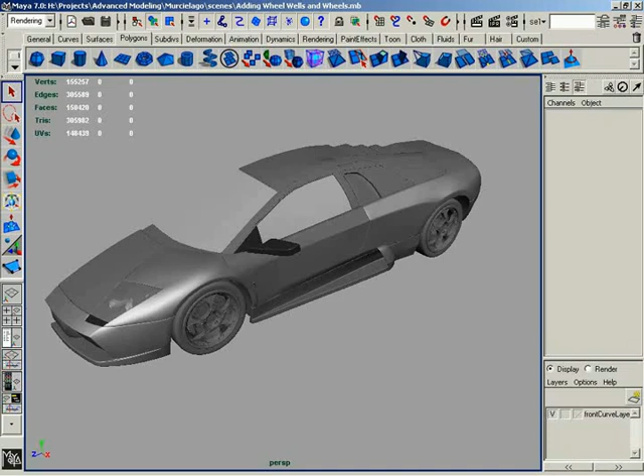Alright, it is finally time to mirror the body of our car over to the opposite side.

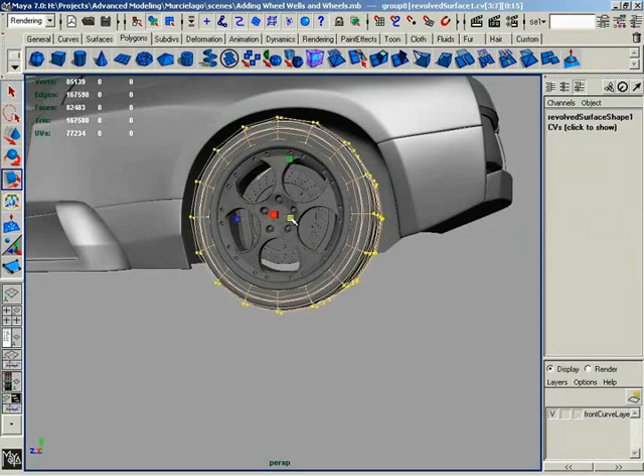First I want to look at the wheels, because there was something I forgot to mention in the last video. The back tire's rubber part is actually bigger than the front one. So grab these five hulls around the tire and scale them up uniformly just a little bit, which will increase the size of the tire. Then select any part of the wheel, press the up arrow key to grab that group, and push it up a little so the wheels are level to one another.

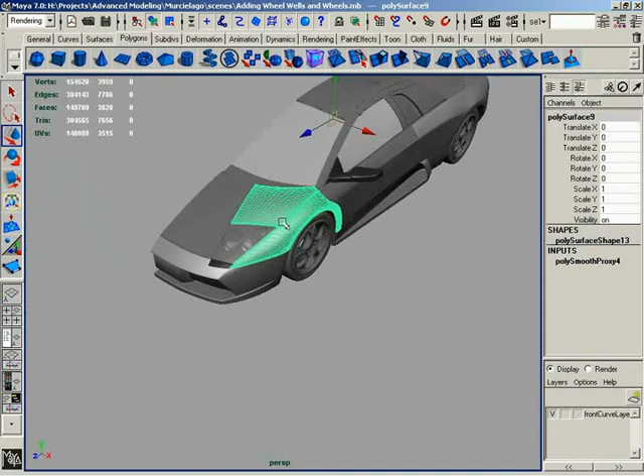That looks nice. Now we need to kill off some of that extra history we may have failed to delete. Depending on how religious you were about deleting history, you might have some or none. I know I have some. Go grab all of your smooth proxy meshes and set them to low res. Be very thorough, even things like the inside of the mirror. Make sure every piece is set to low res, and this is where that blend material really helps you visualize what's still set to high res.

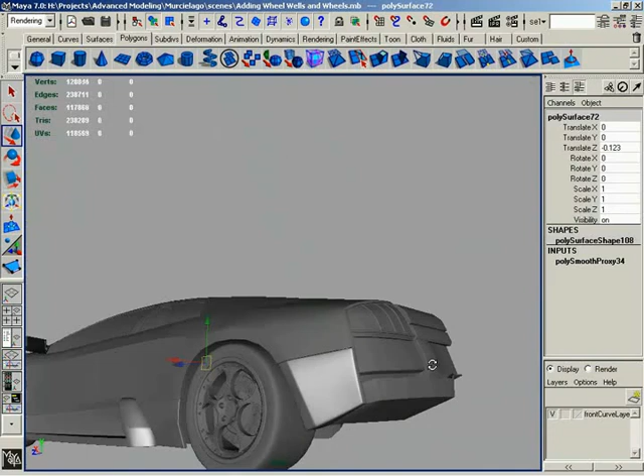Looks pretty good. Also, because of how we duplicated this rim, we don't have a connection between the low and high res that we can switch between with the tilde key. So delete the high res on this rim, select the low res rim geometry, hit Control-tilde to create a new high res, and then you can toggle between the two. Just a quick trick from me to you.

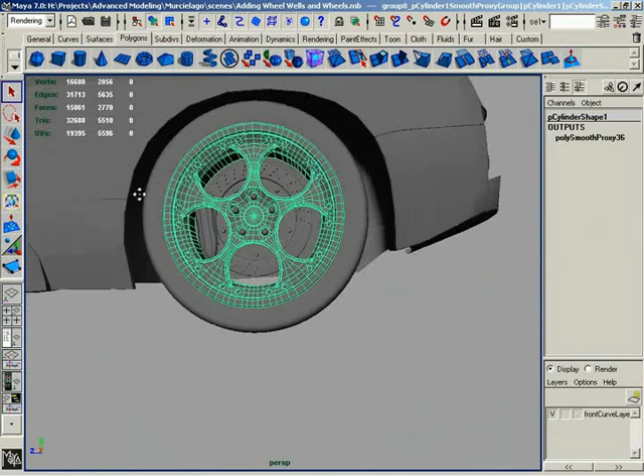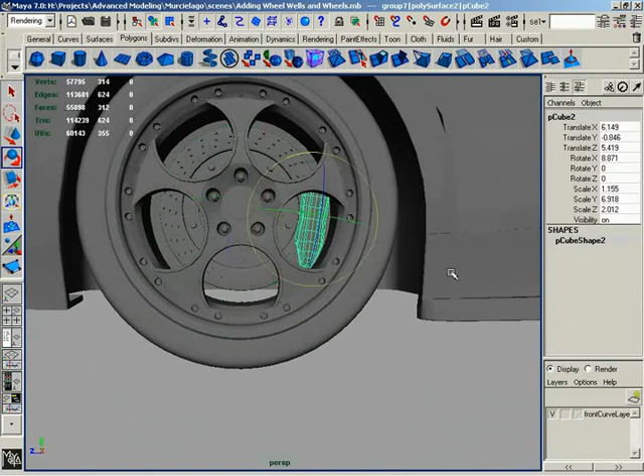One more thing about the wheels. On this car, the brake calipers in the back are at the front of the wheel, but at the front wheel, the brake caliper is actually at the back. To spin this around, grab your brake caliper, shift select your brake disc, hit P to parent, then grab the brake disc and spin it around. Just spin it around in X, like so. I think it's a little low, not exactly on the back, down just a tad. Then grab your caliper by itself, hit Shift-P, and there you go. Just a real quick trick, me to you.

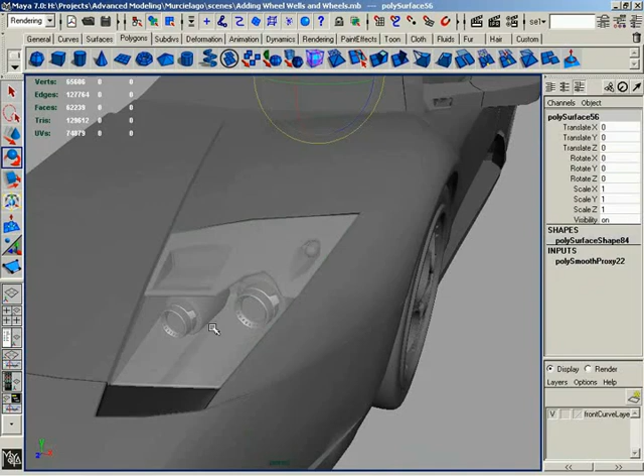Now that we've done that, we need to go through and systematically kill off some history. Look at that, still on high res — be sure to set that to low res. I'm adamant about this because if you accidentally delete history on a high res object, you lose that connection between the high and low res. So make sure everything is set to low res, including this one here. Take it one piece at a time: select it, whether it has history or not, then go Edit, Delete by Type, History.

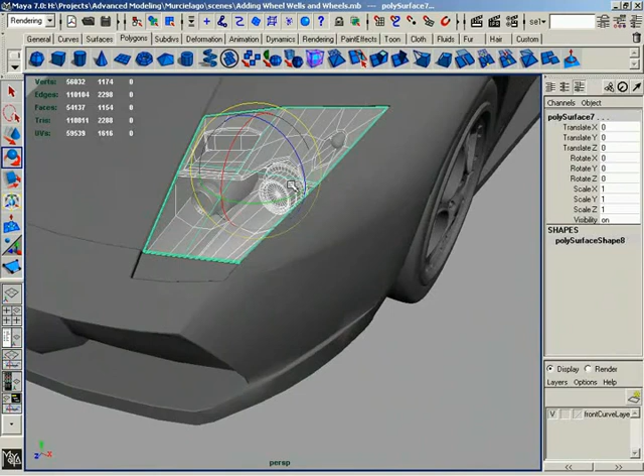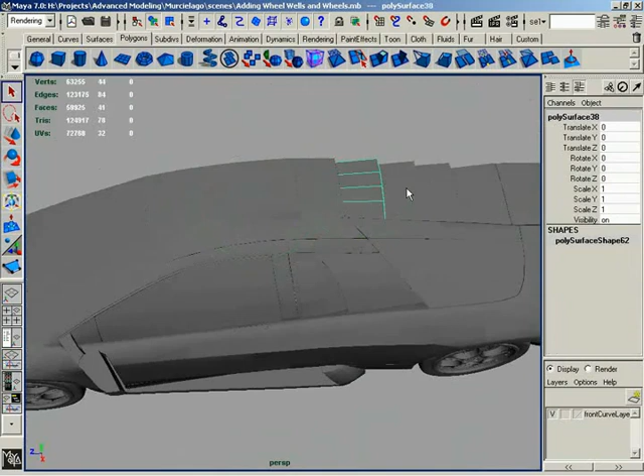Now I can just start clicking and hitting the G key — anywhere you see history, just hit G. That had a little bit. Ooh, this one's got a lot. That's got some history, and that's got some history too. Look at us killing off the history all over the place. We can probably grab all of this at once and kill off history here and here. That's got a lot, that's got a lot, this has got a lot. Ought to be ashamed. Tons of history there. Let's grab all of this and kill that off. Oh, that's still on high res, so set that back to low res first, then delete its history. Okay, that's everybody — all history is now gone.

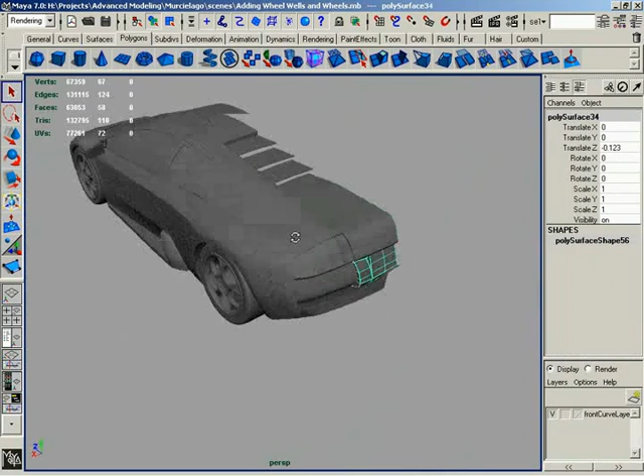Now we need to mirror over to the opposite side. Here's a quick trick for this: come over to the top view and draw a marquee selection box that just barely covers the very middle of the car. This will select all the pieces that need to be mirrored.

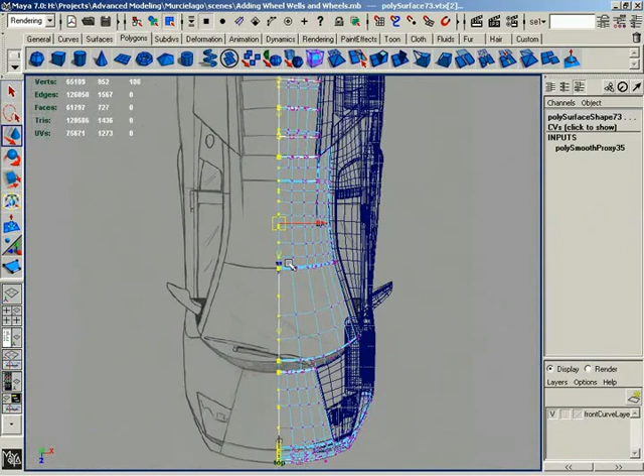Now that you've done that, back in the top view, press F9 to select vertices. Draw another marquee selection box that just barely covers over into the model — this will grab all the vertices that need to lie on the central axis. Get your Move tool, make sure it's in World mode, click the X-axis, hold down the X key, and middle mouse click on any grid point on the center line. This snaps all those vertices back to the center X-axis, which is what you want.

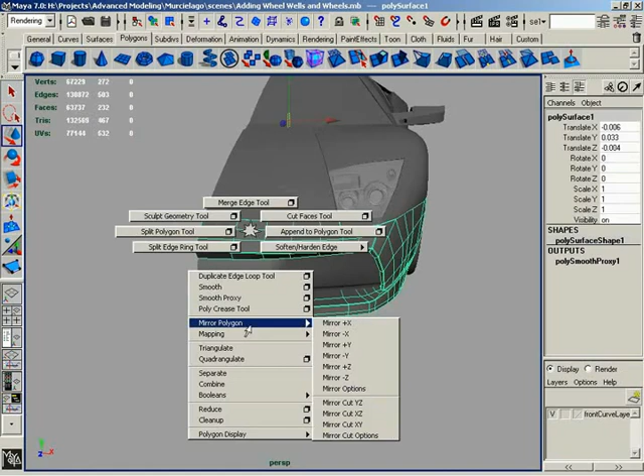Alright, time to start mirroring geometry. Take each piece that needs to be mirrored, hold down the Shift key, right mouse click, come down to Mirror Polygon, mirror in -X, boom, there you go. Now grab each of these pieces and hit G — but only the pieces that actually touch the center axis. Do not try to mirror things that lie outside, like the mirror or the headlight.

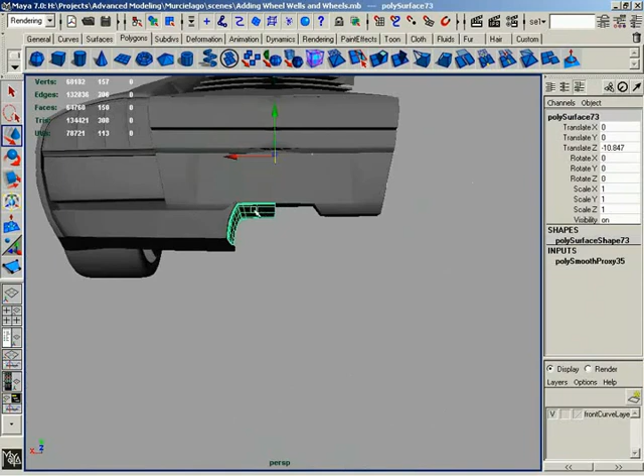Okay, and this, and this, and this. Oh, look at that, folks - that was still set to high res.

Undo, undo, undo, undo - make use of those undos. You know what they call that? They call that a mistake. So there it is, back on low res. Now let's delete out its history.

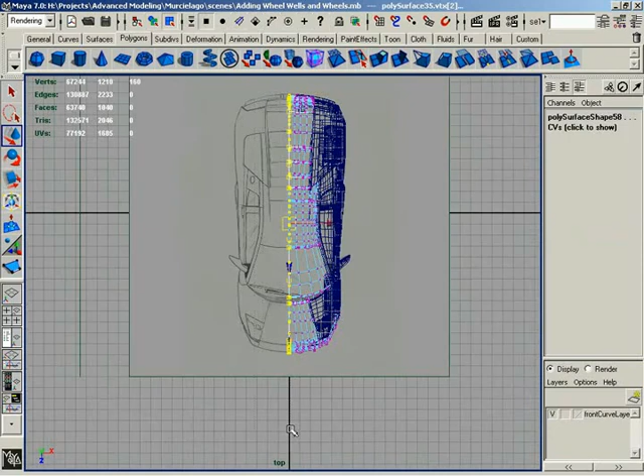Watch out for those. Okay, now real quick, same story a little bit faster. Grab everything that runs down the center, F9. Grab all the vertices that lie on the central part of the axis. Snap those in X right back to the center of the grid. And now start mirroring - shift, right mouse.

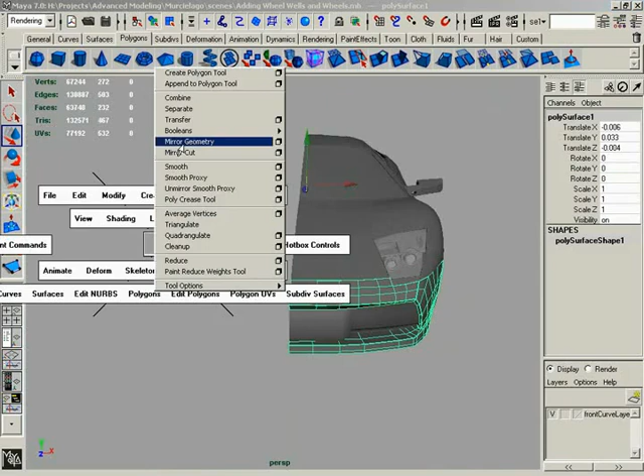Come here, you. Make sure I have that selected. Am I in some sort of weird object mode that I'm not aware of? I guess so, that's fine, we'll just do this the other way. Polygons, mirror geometry, and let's make sure that we are set to -X, like so.

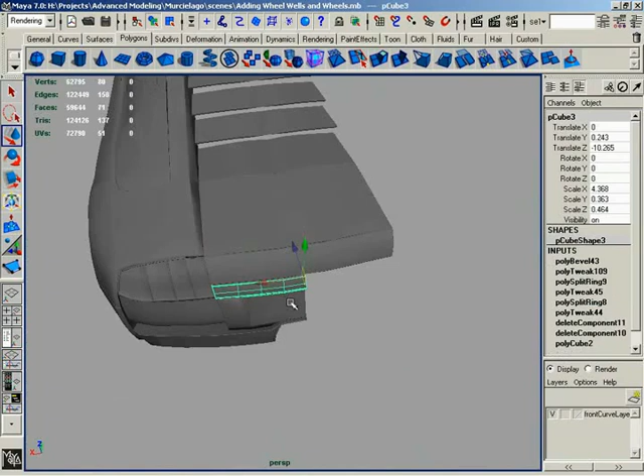Now just hit G all the way across. Make sure you grab, say, this guy here at the middle. Looks a little bit weird. Oh yeah, don't worry about that - things will look weird right now, we'll fix that here in just a moment. So mirror all of this, all of this, all of this. Little wing here in the middle, and finally this little piece.

And there you go. Now you'll notice some pinching, some problems, and this is because you are over-merging - your merge tolerance was set too high. It's not a problem, just grab all of these pieces you just mirrored. It's real easy to do in the top view. Go to your inputs and click on that poly mirror node.

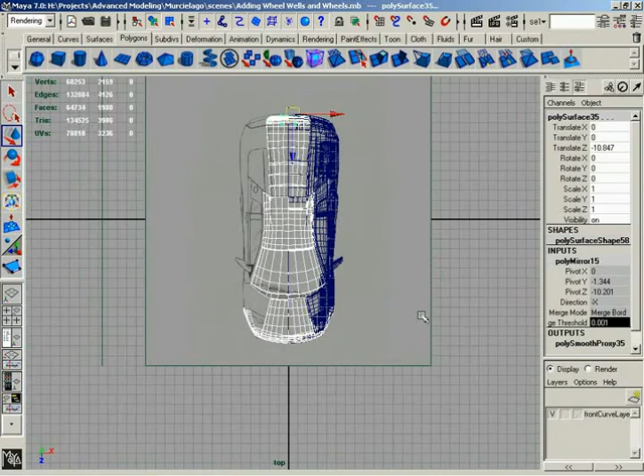You're actually changing several nodes at once. Set your merge threshold down to 0.001 - that will fix these all the way across. Now take just a moment and check each of the pieces you just mirrored. Looks like we need to mirror this one - missed it. So let's see: mirror geometry, -X. There you go.

And since I don't have this smoothed, we will just go ahead and soften, harden edges. We'll soften all of those. And I may end up smoothing that here before all is said and done.

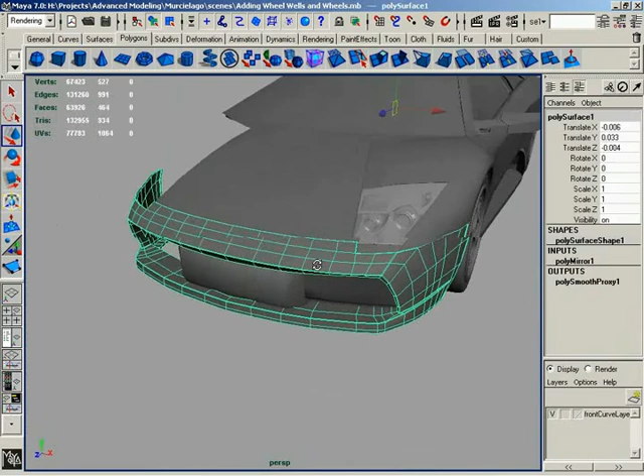But take just a moment, set these to high res, and look for any errors or discrepancies. The hood looks pretty good, this piece looks good, windshield looks good. The roof looks like it needs some tweaking - it looks like somebody sat on the roof and kind of crushed it in.

So these are some things that are a little bit tricky to discover until you have mirrored, in some cases. So don't worry about it, just take a moment and fix it up.

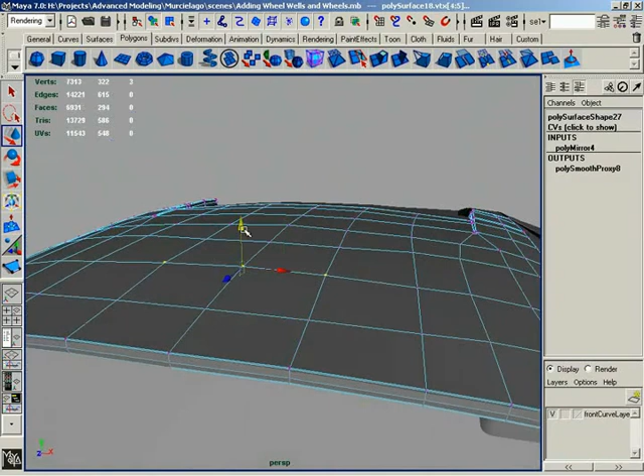And it looks like these need to be kind of brought up, and then we can probably bring all three of these up together just a little bit. Pull this guy up, and I think that fixed it right up. So there you go, and that's looking pretty good.

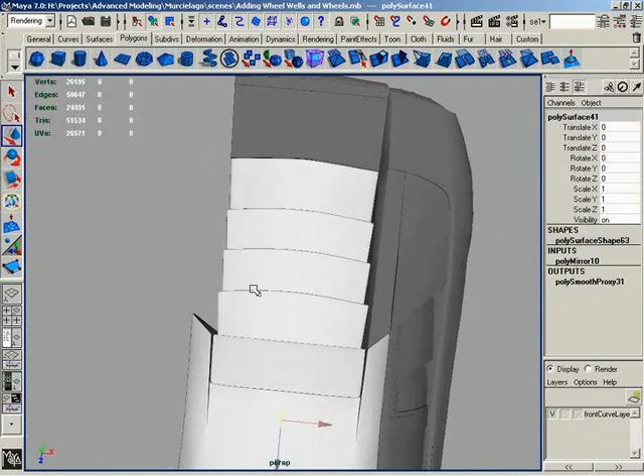And it looks like these pieces back here in the back, they're looking pretty good, but it looks like maybe there should be some more rounding - like there's a little bit too much of an angle on the left and right sides.

So here's a real easy way to fix this. Set them back down to low res. Take your move tool, hit W, left mouse, switch on reflection. Now in my case, we're reflecting on the x-axis - you can tell because you see the little plane appear on the move manipulator.

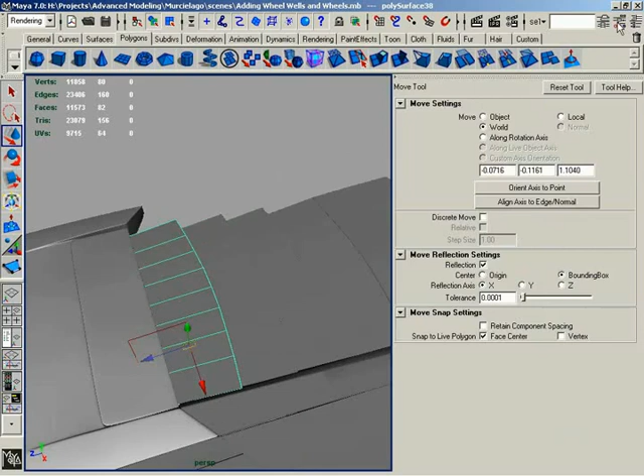This is a Maya 7 feature, by the way. Make sure your reflection axis is set to X - if you need to switch on your move tools for just a moment, check out your options. Now the cool thing about this is it's going to make the exact same motion on the opposite side of your model. So we can grab, say, this vertex, tug it out a little bit to create rounding.

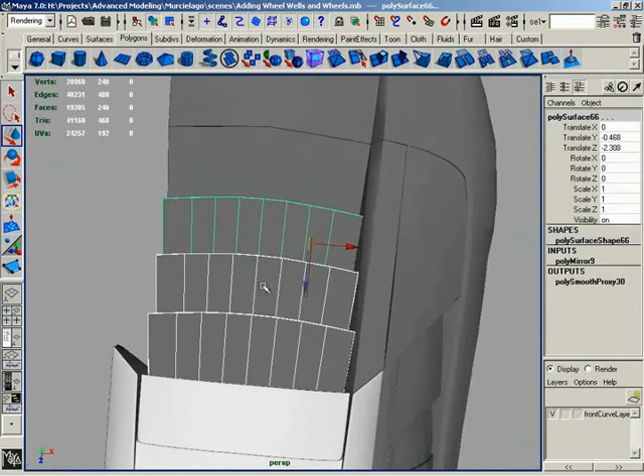But what I want to do is go into object mode for just a moment. We're going to grab all three of these panels, then press F9, and we're going to fix them all at the same time. So if I grab all three of these vertices, notice I'm actually moving their neighbors on the other side of the model as well. How cool is that?

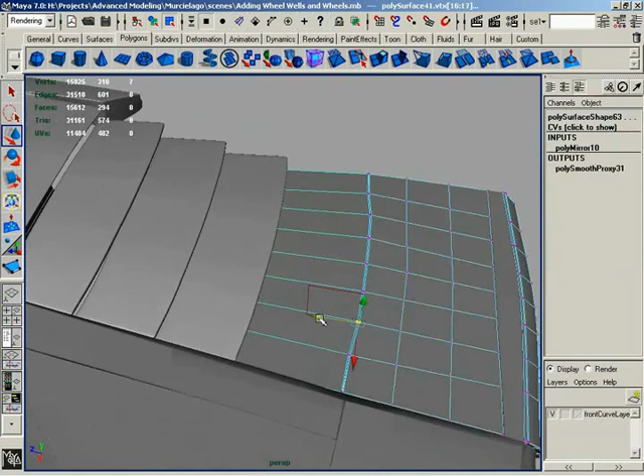And I think that did it - just a couple of quick tweaks, and now the rounding looks a bit nicer. Let's clean the rounding up on these two pieces as well. So we'll select the both of them, press F9, and just make a few quick adjustments.

All right, there we go, sweetness.

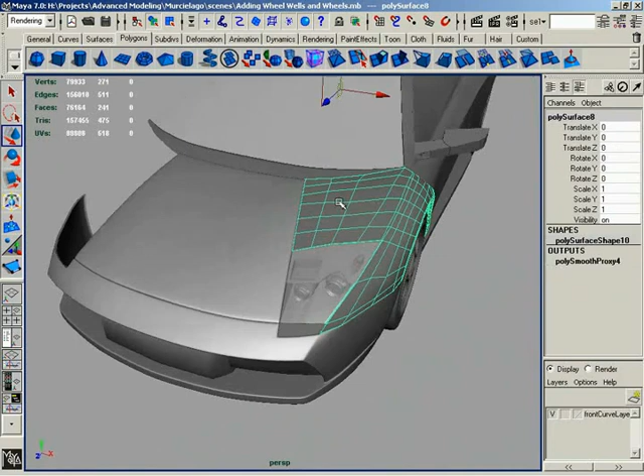After we've done that, all we need to do is start duplicating these other pieces over. These are pieces that can't be mirrored—they need to be sent over to the other side of the model. If we try to mirror these with shift, right mouse, mirror polygon, and -X, you'll see it just mirrors at its minimum.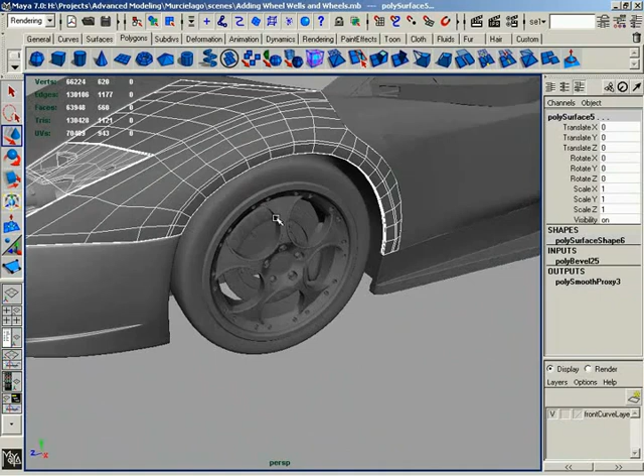We actually want to duplicate it far over to the other side. So we'll start by selecting every piece that has been smooth proxied. This might take a second, so be patient. There's all the windshield pieces, the fender—don't worry about the rims, we'll handle those separately, just worry about the car itself. There's the door, the mirror, the piece inside the mirror, the window, the door piece. And look, we deleted history on this, so that's now the official one.

Oh no, it's not. I thought we had killed history on it. Goodness gracious, let's kill off its history now. I must have skipped it somehow. No problem though, as long as we catch it at some point.

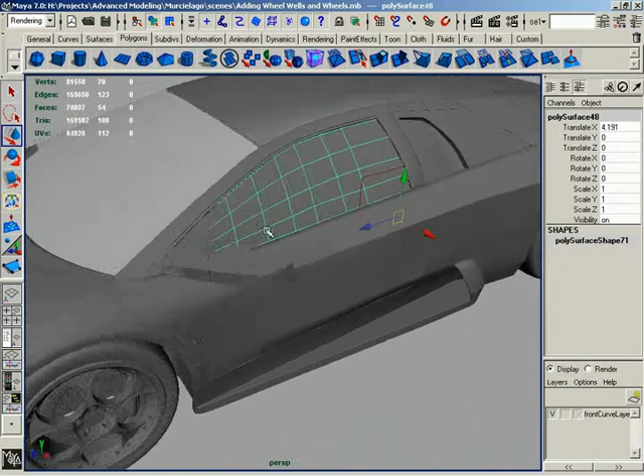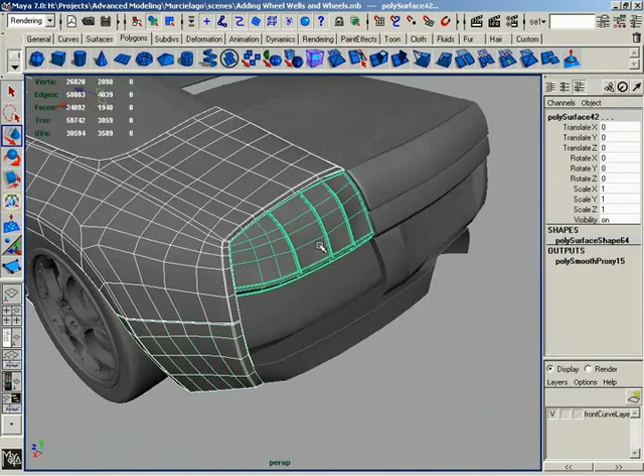So reselect, make sure you get the low res over here. Low res, low res—you want low res on all of these. It really doesn't matter which one, but I'd prefer if you selected the low res. Everything that was smooth proxied, again ignore the rims, just body parts—that would be the bumper and the wing, this little straight piece up here. I think that's everything. Now press the up arrow key once, and this will grab all the smooth proxy groups—a group that's automatically created when you smooth proxy, containing your low and high res mesh.

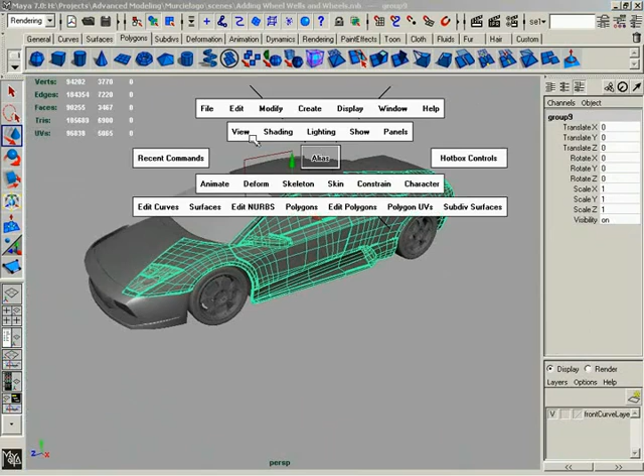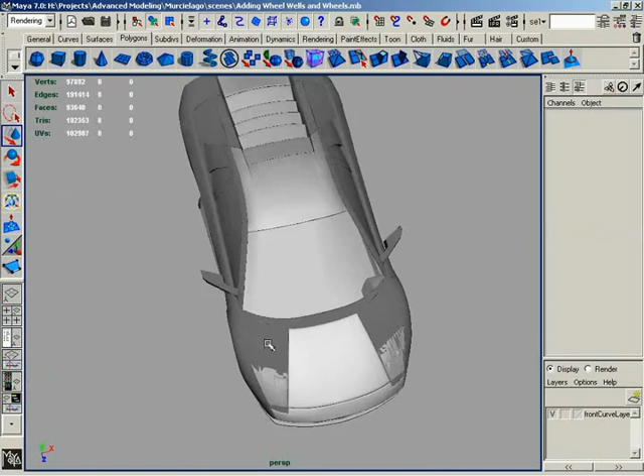Now that you have those, hit Control G to group all of these together. Under Edit, come down to Duplicate, open up your options, and I'll reset my options real quick. Make sure you check Duplicate Input Graph, so you're grabbing all the connections between the nodes. Then hit Duplicate. Now you have Group 10 where you had Group 9 a second ago, or whichever number you might have—it might be different in your case. Set the scale in X to -1, and it comes over to the opposite side. Because you duplicated the input graph, you have a low and high res for all of these pieces as well, and they can all be toggled. How nice and easy was that?

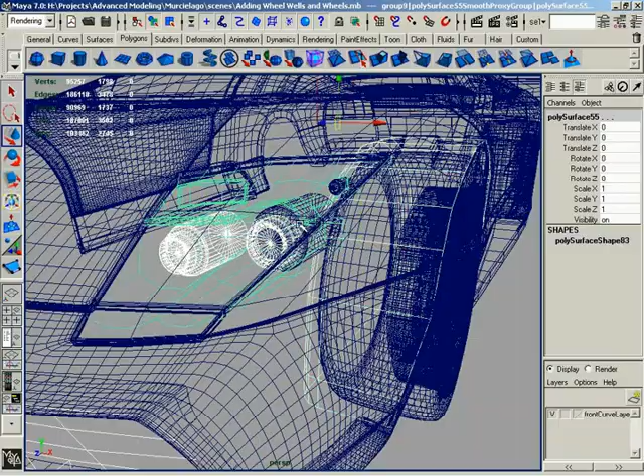Now let's start grabbing some of these pieces that were not smooth proxied—things like this little vent piece up here in the front, the wheel well. If I go into wireframe, the pieces of the headlight are a little easier to select. All the little lamps that are up inside. Again, don't worry about the wheels for now. We get the wheel wells, and we have this little vent piece back here in the back. I think that's everybody.

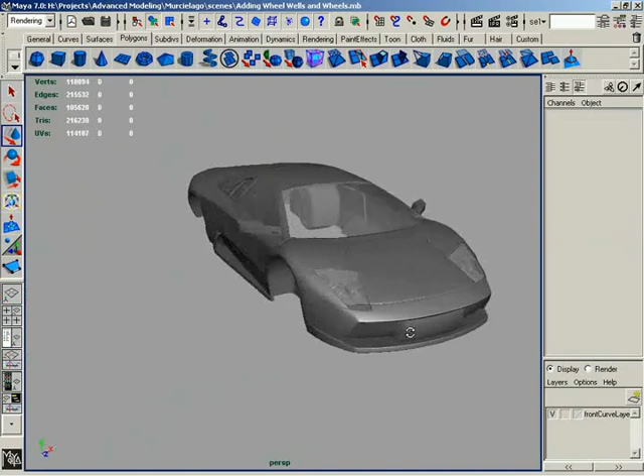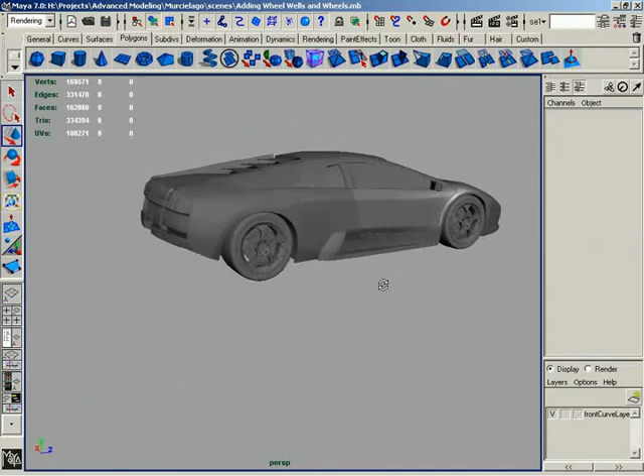So now we'll do the same thing: Control G, Control D, set scale X to -1, and now that is also on the opposite side of the car. Looking good, now you just have the wheels. So you can press the up arrow key, select either part on both of the wheels, press the up arrow key and hit up until you have both of these groups selected. Hit Control G, Control D, once again set scale X to -1, press Enter, and there you go—with that, your car has been completely mirrored.

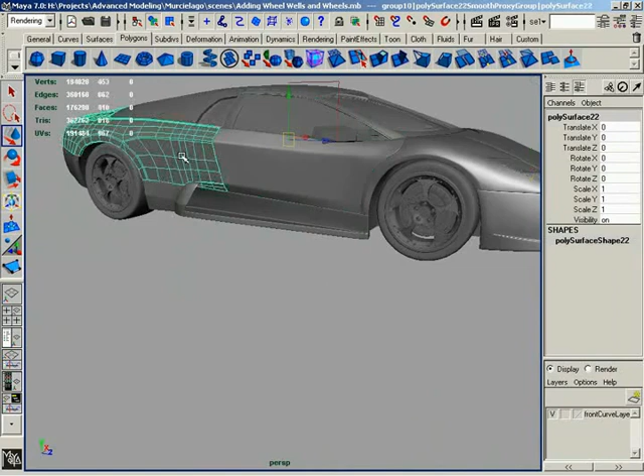You can now, if you want to, switch over to high res on all of the bits and pieces. So take just a second and I'll do that just so you guys can see the final. And that's still high, that's high, that's high, that's high. Dun, dun, dun, dun, dun. And that was already cranked up. High res, high res—your materials also came along for the ride. How cool is that?

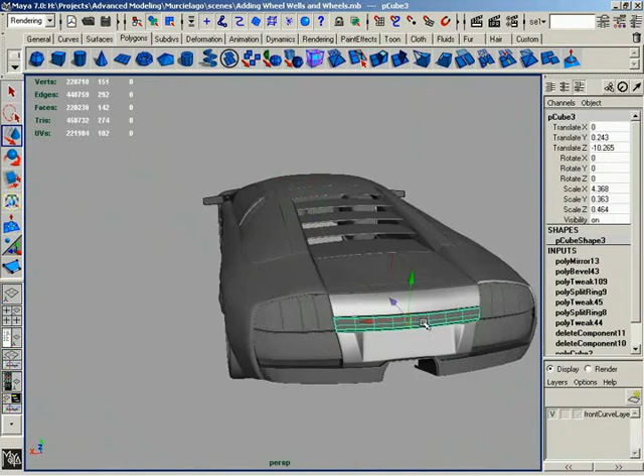Whew, getting a little bit heavy on the old viewport, isn't it? That's the cost of a beautiful model. That's the smooth, but it didn't have a material on it. Okay, there you go, I guess we could.

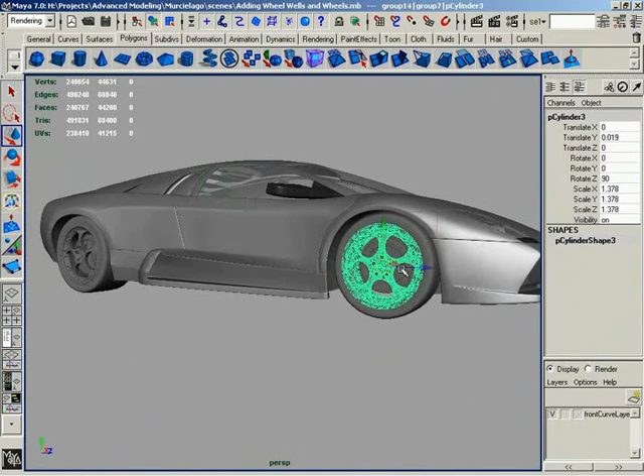The only other thing we could switch on are the rims themselves. In this case, we don't have the high res on the rims again, so rather than fool with whatever our duplicate settings were, we can just delete out the high res, then hit Control tilde on the low res to get a new high res. Back here, this one actually is switching, so that's all good. This one's not switching, so we'll kill out the high res, Control tilde to create a new high res—very quick fix.

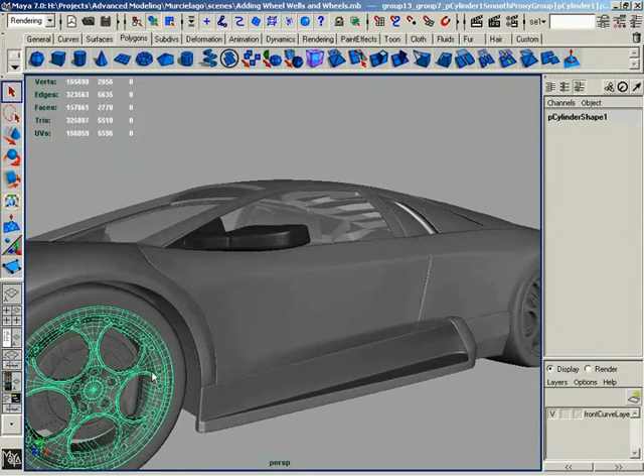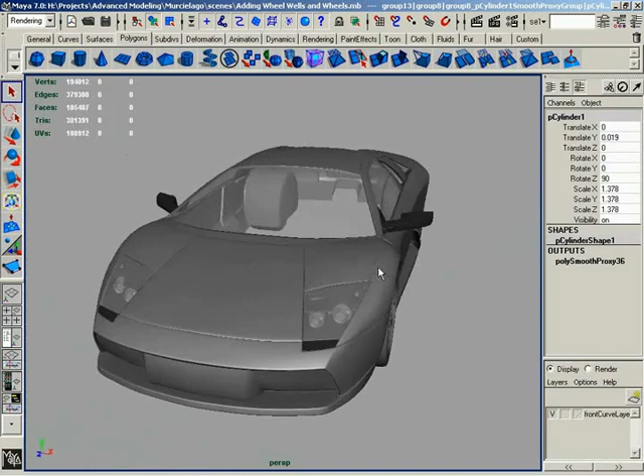And wow, so there's the entire car, all high res, and looking really good. At this point, the only thing you could do is make sure that you save your work. Really, with that, you are done with the outer shell of the car, a few tweaks aside. You may need to go in and clean up a few areas, just check your car out and see what you think. And that is going to wrap it up for this video. Thanks a lot.